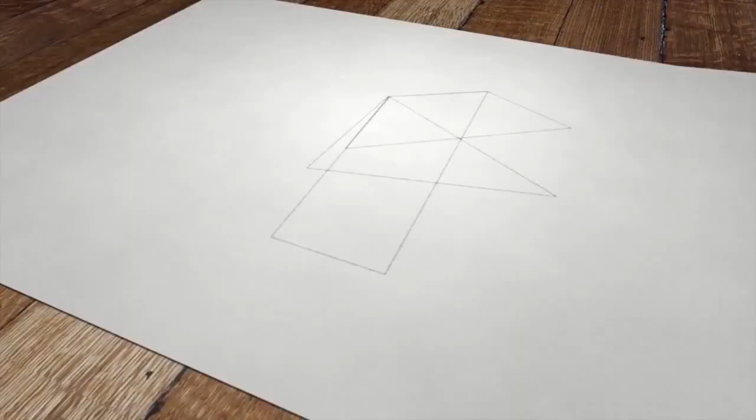I'm going to share with you how I made this guy over my Christmas break. We get to work with so many great companies over the course of the year, and over Christmas we just shut down, so I was able to log some good quality time with our CNC machine here in the office. I made this trophy to commemorate my favorite soccer team in the Pacific Northwest, the Portland Timbers, and they won the championship this year.

So what I got here is the Timbers axe and the star for the championship and the year. I was able to make this thing out of white maple and walnut, and I did it all in Fusion 360. This video is going to show you how I was able to do both the design and the manufacturing part all within the same file. Hopefully there'll be some best practices, or maybe some tips and tricks you didn't know, that you can use in your projects in the future.

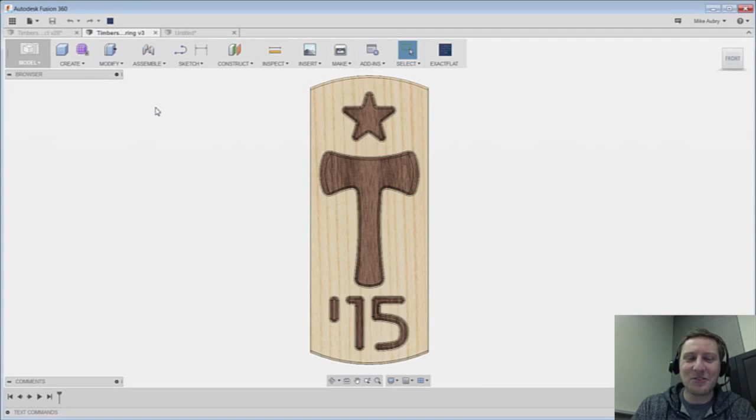So I'm going to start off by making a new part here, and we'll start on just the back side. The first thing I do when I make models like this is set up all the guiding parameters for what I want to create. I'm in creation mode right now, but I still know I'm going to be making changes later.

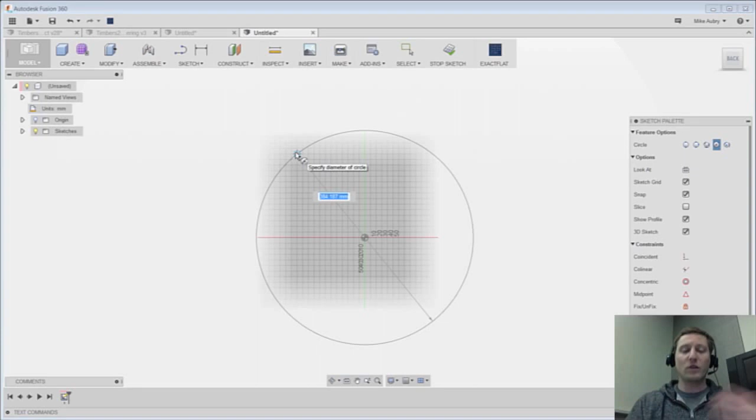So I start with what I know, and I know I wanted this stump. I wasn't sure if I was going to do it in one piece or multiple pieces, so I create it with these dimensions in the sketching environment. Basically it's going to be about a foot. Let's start with that. I could go back later and partition if I need to, but this is my first general size.

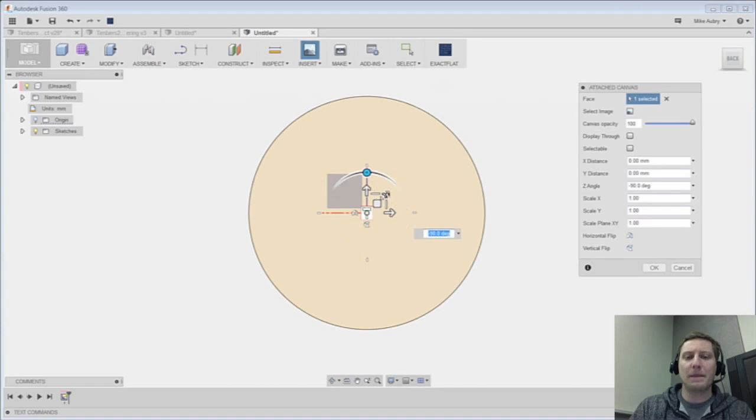The next thing I'm going to do is bring in my canvas of what the axe is going to be. That's the central piece I need to play around with. So I'm going to bring that in. I don't know how big I want it to be yet, so I'm just going to generally size it, then do a quick sanity check of how big or small it is. I'm going to turn things like display through on as I start to create things, so I can still see it.

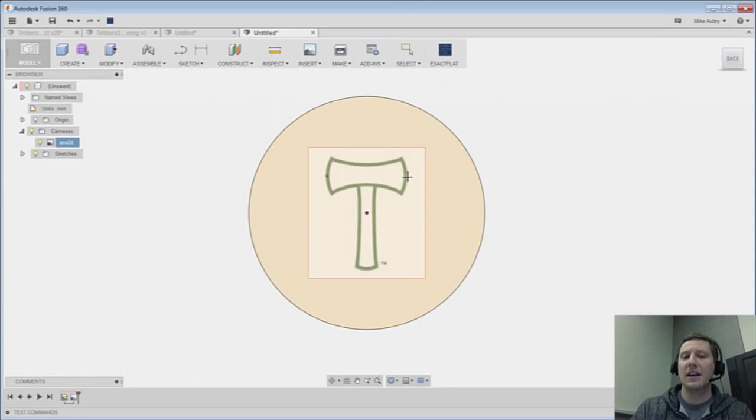Let's bump down the opacity so it's not in my face so much, and we'll create around this. The next thing I'm going to do is calibrate this. So I'll go into my canvas and calibrate it, just by clicking here and here, to get it roughly to about the size I think it's going to be.

So we'll say maybe 7 inches ish. I mean, that's really big, I'm going to have to size this down, but that's okay. So we'll just leave it at that size for now.

The next thing I'm going to do is start actually modeling it to get the proportions right. I know that's going to be a little big, but I'll go ahead and model to this, and I'll use the scale tool to make it smaller later.

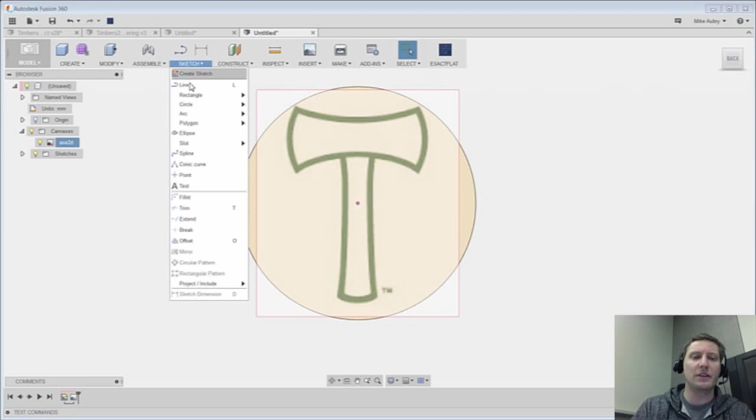My first thing is I'm going to register this guy as being the actual trophy profile. So that's one sketch I'll be maintaining. The next sketch I'll maintain is for my inserts, and I'm going to make their own sketch for that. I'll start by creating this axe, and then we'll make the star, and I'll put the numbers in as well.

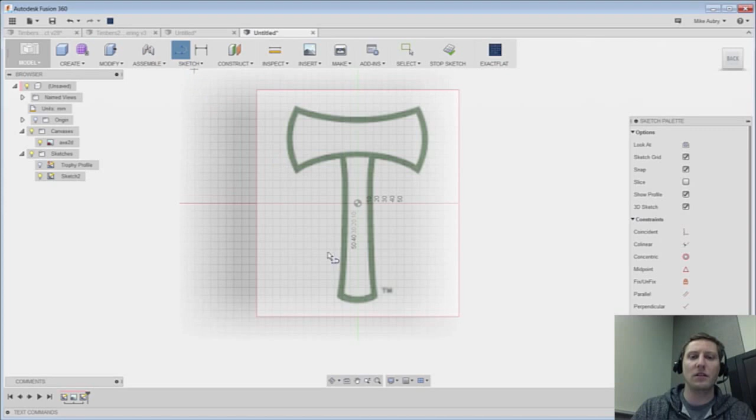One of the things I'll do is start by creating basically a central axis, and I'll mirror these guys on the other side so it's symmetric.

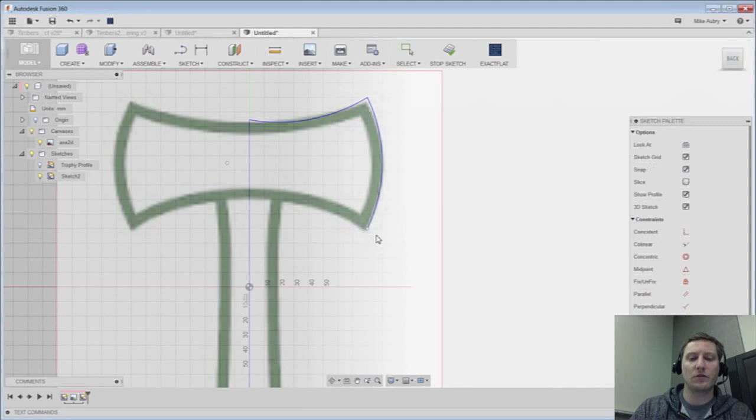With the arc here, I'll start making these arches, picking kind of there to there. It doesn't have to be exact here, I can go and change these things up in a bit. Go U to U. Actually, let's make sure that they connect though.

So make sure these guys are there, and we'll say go, and this guy actually kind of straightens out. So I'm going to take this guy, go there, and then this guy, go to there. I like that, and then we'll say here, and that looks pretty good.

Now to make sure that this guy actually lines up, I'm going to add these little lines to make some tangencies so everything nicely rounds off and I don't have these hard edges. I'll add these extra lines here, and make them all construction lines so they aren't actually part of a profile later.

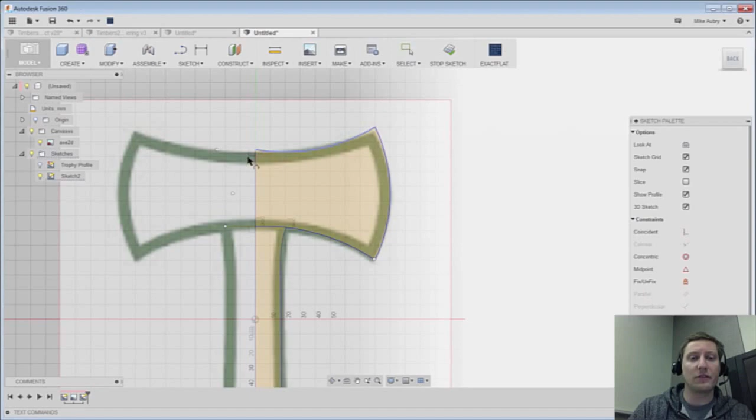Now I'm going to use my tangency constraint, so you'll see we'll make this guy tangent, so there'll be a nice continuous movement in this axe. That's looking good, pull this guy in, and we'll do the same thing now to this guy. Oh, there we go, take this guy and you...

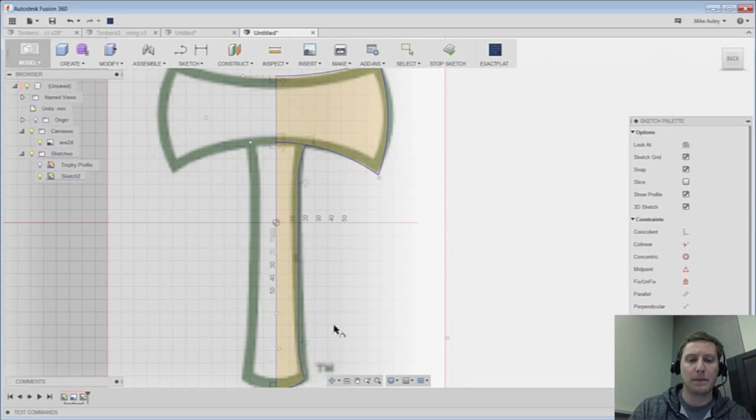Love that. This guy needs to be vertical, so I'll use this vertical constraint to make it so it's always up and down. Let's see if those constraints behave a little better. Yep. Love that, and then the final one. Okay, so that's looking really nice.

Actually, that guy models really fast, and that's looking pretty good. So now what we'll do is mirror it. We can do the mirror at the feature level, which is a best practice if you think you're going to be dealing with specific parameters and making a lot of edits and whatnot.

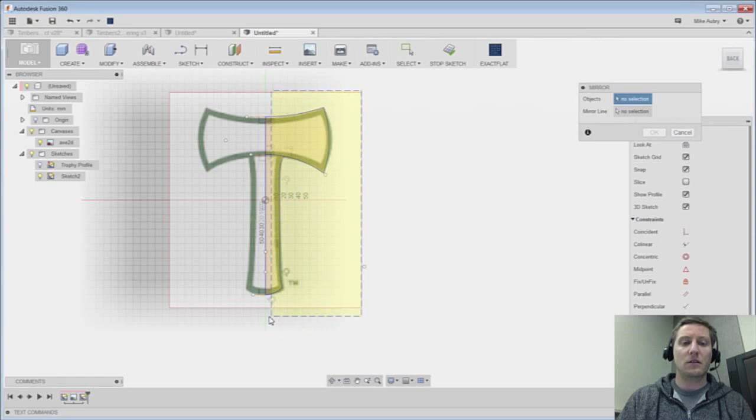My only edits I'm really going to be doing to this guy is actually the scale. So for me, it makes more sense to do the mirror at the sketch level. So I'm going to do this guy and then just mirror it about that center point there, so I have one profile to work with.

I'm actually going to turn around and make this guy a construction line, and you can see now how I can just choose these different profiles. I think I'm going to keep these guys as one big cutout block, but it's nice to have the flexibility—if I wanted to do two pieces, I could. I like that, and I'm going to go ahead and stop my sketch.

So for now, I'm going to keep them as one, and we're going to extrude them out. And for this, how high do we go? I can make a choice for this.

But it might change, and actually the height of that insert is going to be a function of the stock wood piece that I purchase. So I'm going to go ahead of time into my parameters and set one up so I can be more flexible later on. I'm going to call this insert height.

Actually, maybe we'll just call it insert H, depending if you can remember this stuff. So we'll call it insert H, and it's going to be, we're in America, right? So it'll be something like 3/4 of an inch, maybe a 1/2 inch. I'm not sure, I'll say 3/4 inch.

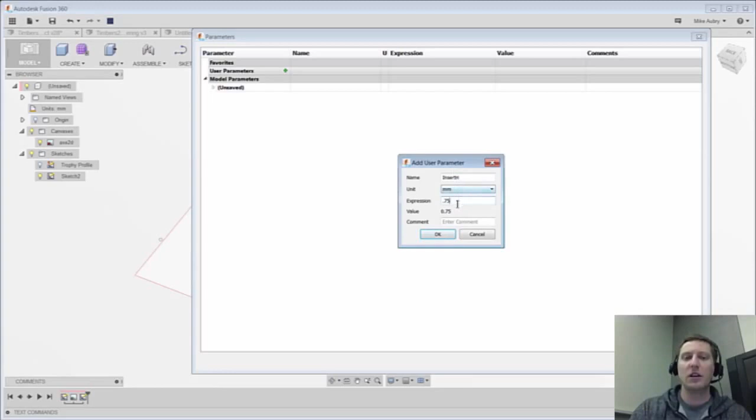And then that will be actually what I then go and extrude. So I'll just take this guy and extrude, pull it up, and then just type it in. We'll call this guy the insert H. And that height will be super handy because we can keep that now for all the other different pieces as well, and if we need to change it, it's going to be one place where we change it.

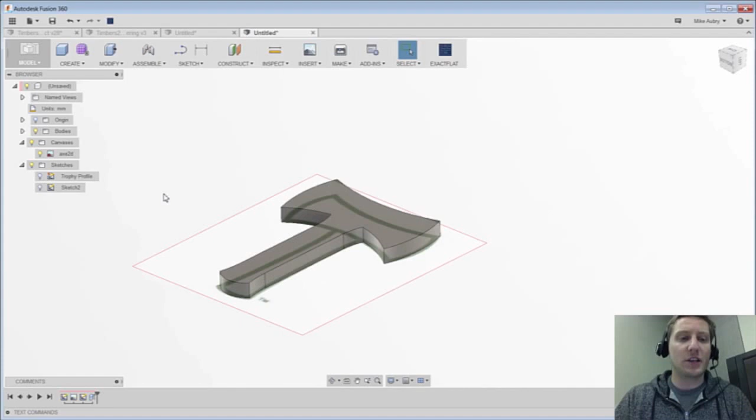So I got the trophy done. So now this is going to be my insert profiles. Good best practice to name these, because then you know what you're doing later. If someone else has to edit it too, they know what they're looking at.

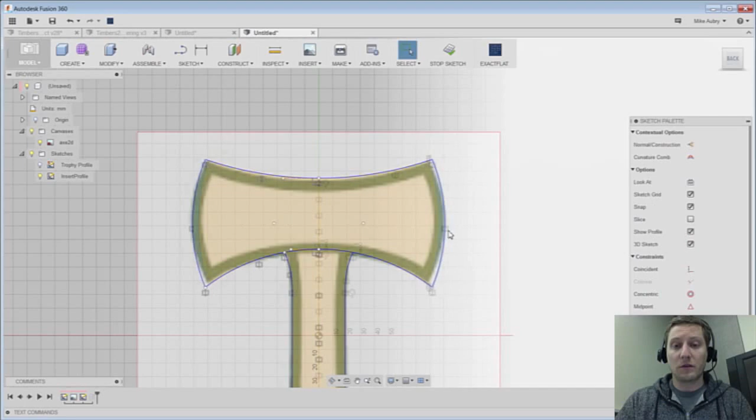So let's go and actually make this guy a little bit further out. I'm not sure I like that. Let's make it so these guys, actually the more I'm looking at this, I would like you and you to be aligned, and you to be a little bigger. Yeah, like that, that's better.

Okay, so now we need to make a star. So I'm going to draw this out the same way I drew it out when I was a kid, you just kind of go here, here. Well, what I didn't have when I was a kid was the ability to deal with proportions. And to do stuff with proportions is really awesome.

We can just quickly use this break tool to basically segment the lines, so now they're all their own discrete lines. And now check out what we're able to do here. I'm going to say I want these guys to always stay vertical. I'm going to use this collinear tool to make sure that these guys stay on the same line. So we'll repeat the collinear.

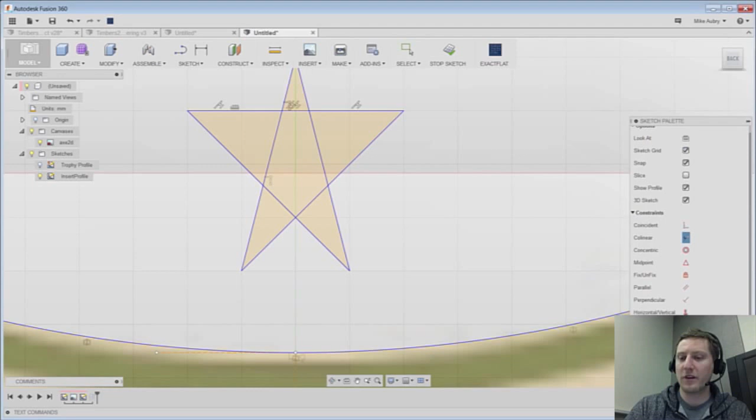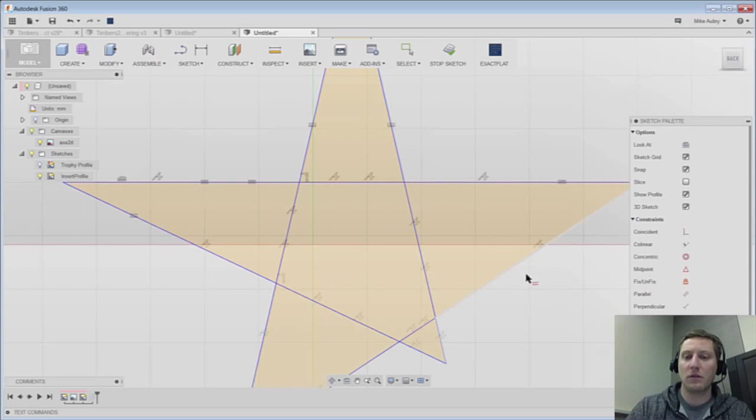You and you, okay, and now we're going to just have a great time making everything equal. You and you, and then you and you, and then you and you, and last but not least, I want you and you, then you. And then we'll do equals. You guys are equal, you guys are equal, then you guys are equal, and then you guys are equal. Oh man, this is crazy talk. Oh, look at all those happy equal stars, it just looks amazing.

Okay, again, I don't really know how big I want this star to be, but I know that's a start. So we just want it to be kind of symmetric about there, and that's looking pretty good. If I wanted to dimension it, I could, but the only real dimension I really care much about for this star is, you know what, one more thing to do here.

Let's best practice this. Let's make these guys in the middle here construction lines so we only have one profile to deal with.

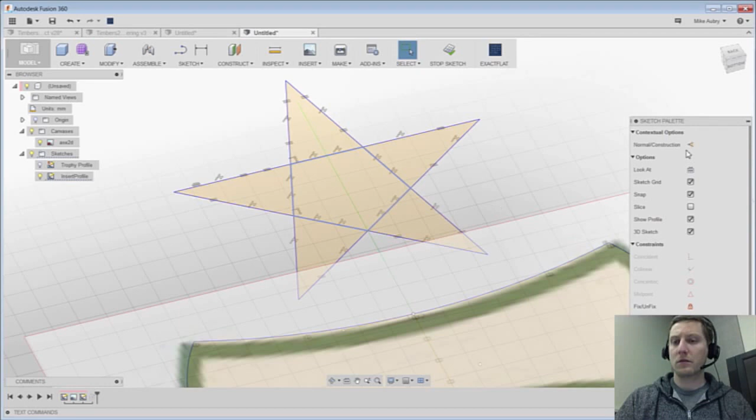All right, we'll take this guy, throw him up, and again we're going to use that insert H. We got one variable. Love it.

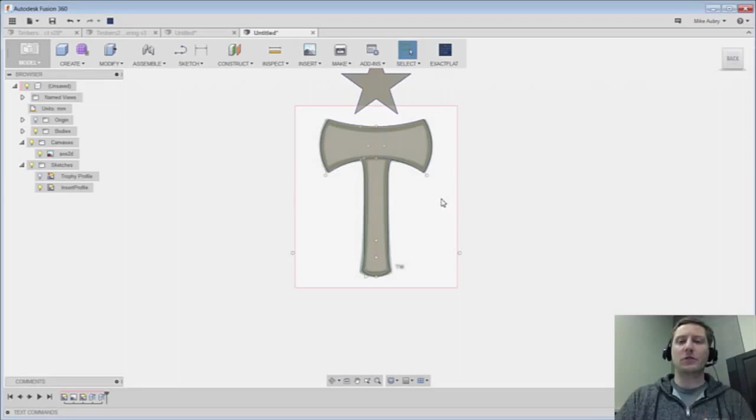Okay, the next thing we got to do is we need to choose our numbering. So one of the things I'm concerned about is that 2015 is just not going to be enough space, like that's too many characters. So I'm going to actually compromise and just go apostrophe 15.

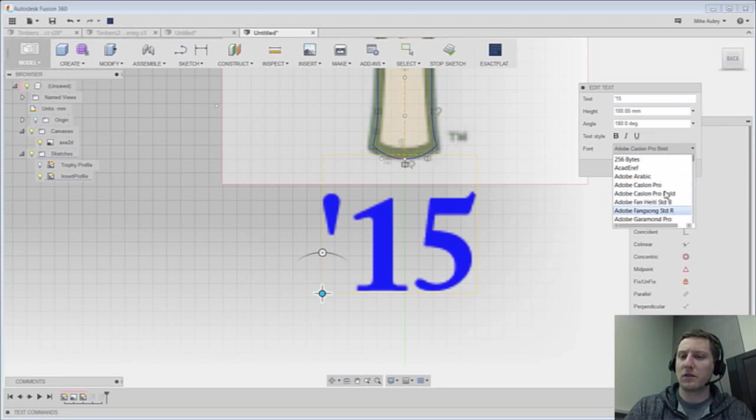So let's go back into this guy and we'll just type that out. We'll just go and take the text, kind of throw it down here. I'm not sure how large or small it has to be yet, but so there's 15. Throw this guy around, and I'll just kind of pick a generic font. Adobe Agency. Oh, Agency looks pretty reasonable. Okay, all right.

All right, we like that value, so we'll go in there and we're gonna need to center that up. There we go, and that looks about right.

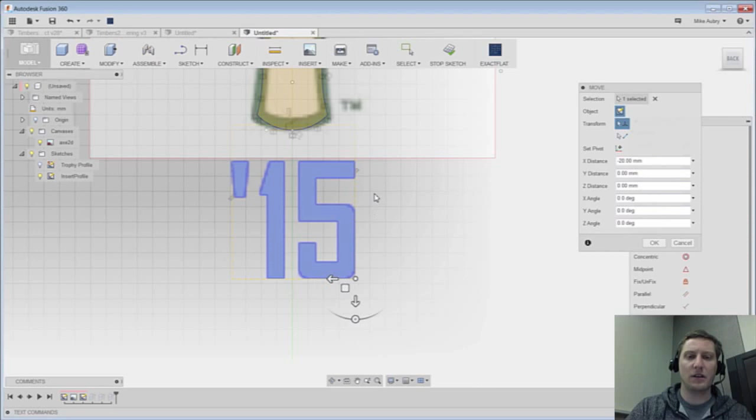And now we've got to make this thing so it'll fit in that trophy stump. So I guess the next thing we need to do is we actually need to make the stump that it's going to fit in. So this is going to be actually a different stock. So I'm going to go in, and again, we're going to want to change this stuff later, so I'll actually call this thing the trophy height.

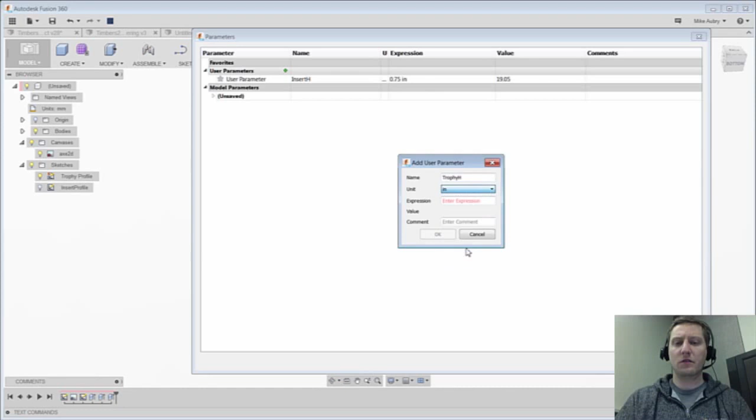Inches, we'll just call it the same with .75 for now. I don't know, half inch, something like that. So we'll take this guy, we'll extrude him. Say we'll just push this down because we're not sure quite yet what it's going to be. We're going to say this is going to be negative trophy height.

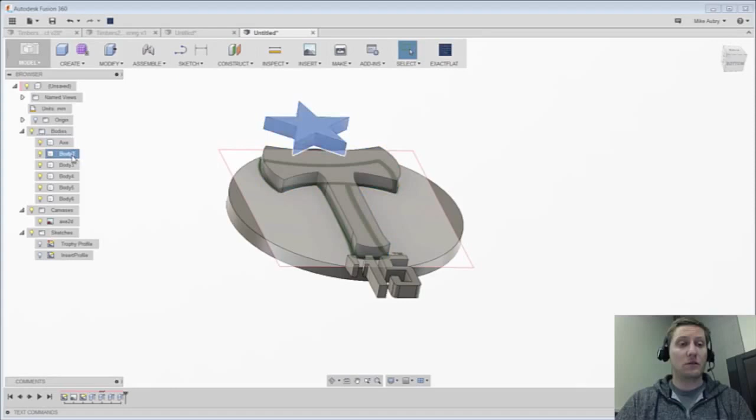New body, so it doesn't join up with the other ones. Let's make sure we're labeling these things along the way so we know what we're working with. So this is the axe, star, 1 the loneliest number, 5, apostrophe, and we'll call this the trophy, or the stump or something like that.

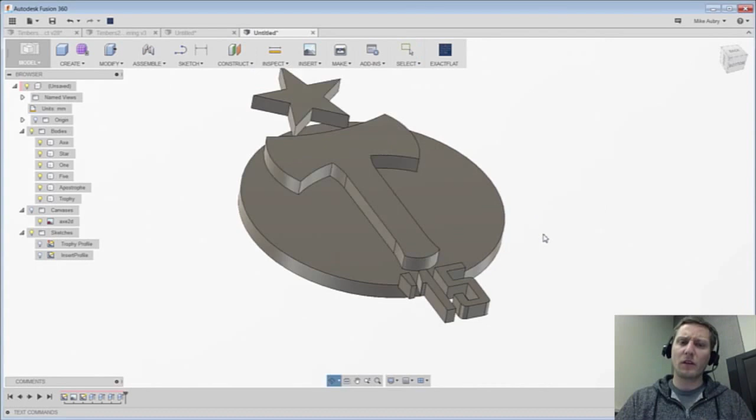Okay, and we'll go and turn off this canvas for now, we're not going to need that. And then we need to get these guys to the right kind of general size to fit.

One of the things before that is we've got to make sure this thing is going to be manufacturable. I know my CNC only has 6 millimeter diameter tools, and I have 3 millimeter diameter tools. I want to make sure the ones I can actually use make everything as flexible as possible, since I can only go so deep with the 3 millimeter.

So actually, let's make it so everything is only doing a radius of maybe 3 millimeters, to work with the 6 millimeter diameter tool.

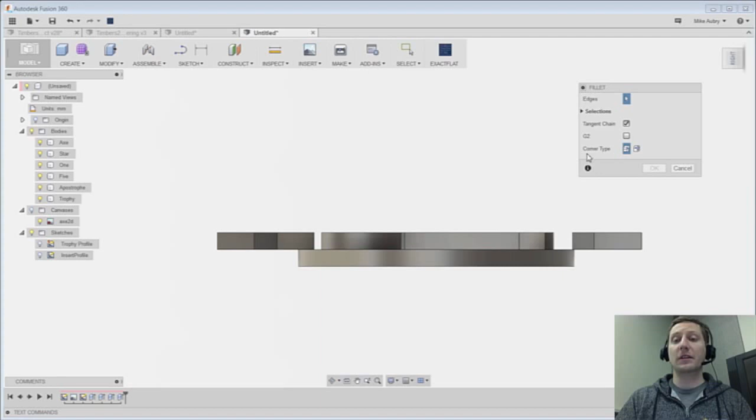One of the ways we can do this is we hit the F key to start the fillet, and this is kind of a slick trick. If you just go across and choose all of the edges on these inside edges here that it's going to have to maintain, these sharp edges on the outer, go around these. It's these inner ones you need to worry about the radius for.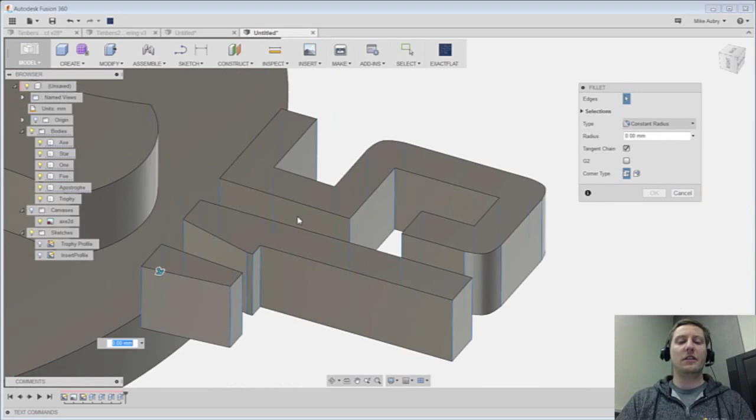Depending on the type of font you chose, you might have a bunch of extra crappy edges on your SVG. So this fillet can help you heal some of those edges and really maintain radiuses that are actually machinable. So this guy will just call us out and see, can it hold a 3? And they can, so we've got 3 on all these guys, which is super handy.

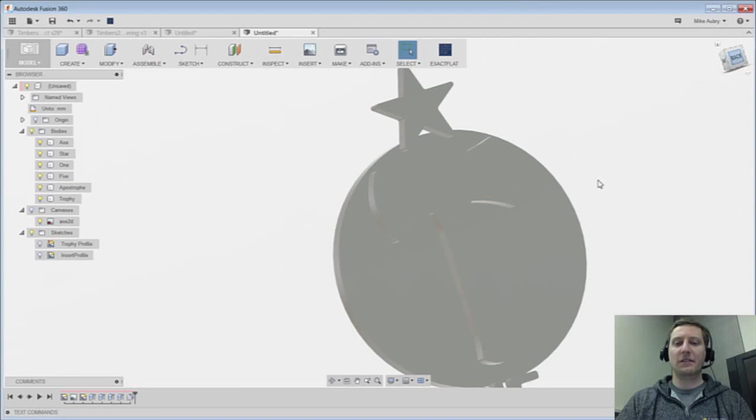But where it gets kind of fussy is that this is going to be too big for the footprint I want to deal with anyway. So I'm going to have to scale all these guys, and probably scale them individually. One thing I'm going to do is scale before I do my radius, because that radius is going to remain absolute. But let's start scaling these things down and see if they can maintain it.

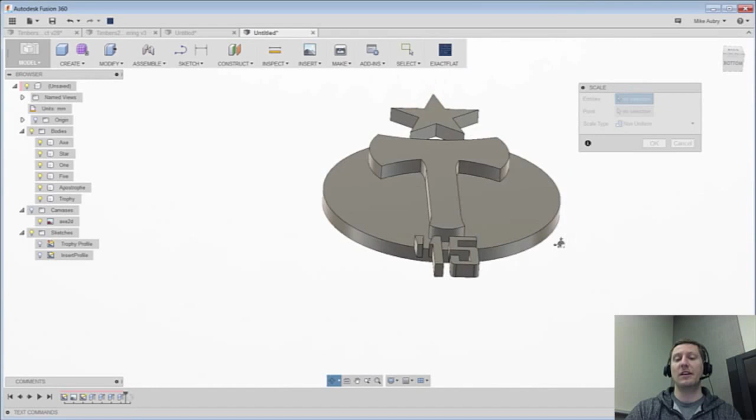So the scale tool is amazing. This is where I know I have a specific height I want to maintain, but I need to actually size down the other proportions. So I can just start choosing these entities, and we'll kind of scale this guy. The point will actually be, in this case, the origin that I'm scaling about.

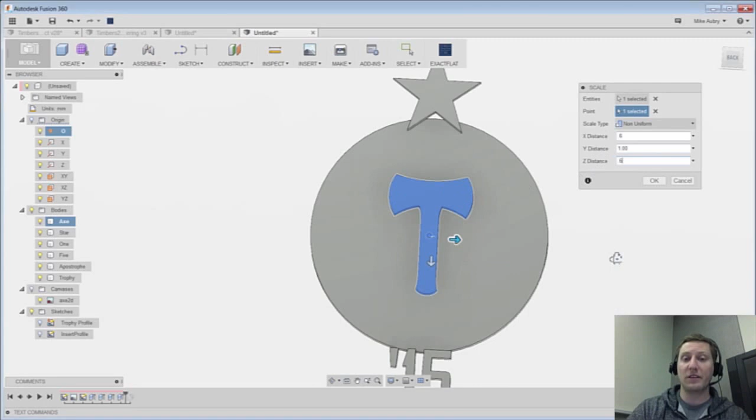Check this out, I can do a non-uniform scale, and we'll size this thing down to maybe 0.6 of what it was on the X and the Y, but we'll keep that Z the same so the height stays the same, and we'll give a little bit of room for the stars to come in. So we'll say maybe this will be 0.6.

I think these guys need to be their own, I'm actually going to give them their own center point to scale around too. So let's give these guys like maybe something like, yeah, that looks like a good spot. Kind of just make a little line for a little point for these guys to scale from.

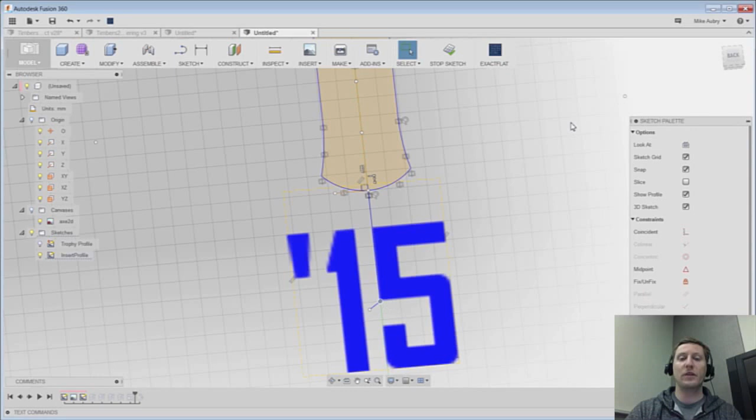So I'm going to go to modify, scale. I'll choose you, you, and you, and then we'll scale about this point right there, and again non-uniform, so we'll bump this thing down to 0.6 again. You get something roughly, yeah, I'm not sure, something like that.

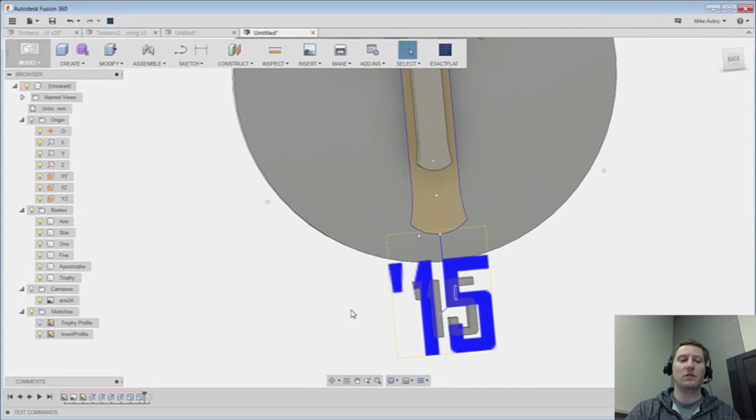Where it gets fun is after we go and take these guys and move them into place. Say it's going to be roughly about there. Um, have we gone too small?

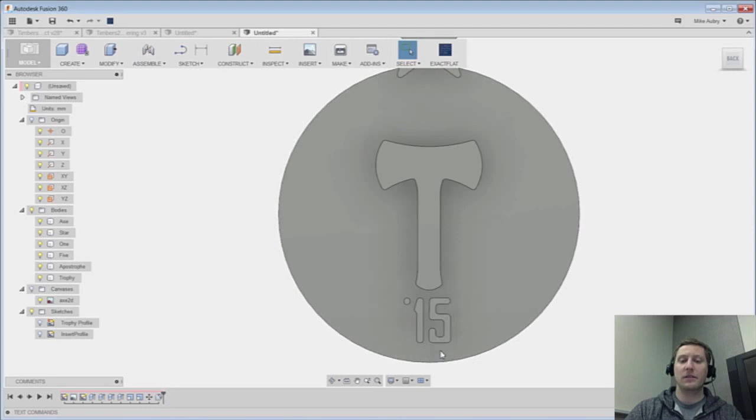Let's go back in our timeline here and turn back on that fillet and see if it maintains, and say, yeah, it does, so they didn't fail. It's looking like it's cutting off some of that one a little bit, so maybe we went a little small on it. But this, I picked a good font, a pretty flexible font.

That apostrophe is looking more like a dot, so maybe we go back and actually change this. Let's bump this up a little bit.

So yeah, that's looking a little better. We can probably even go a little bigger. Go big or go home, huh? Let's go 0.9, see how this thing is.

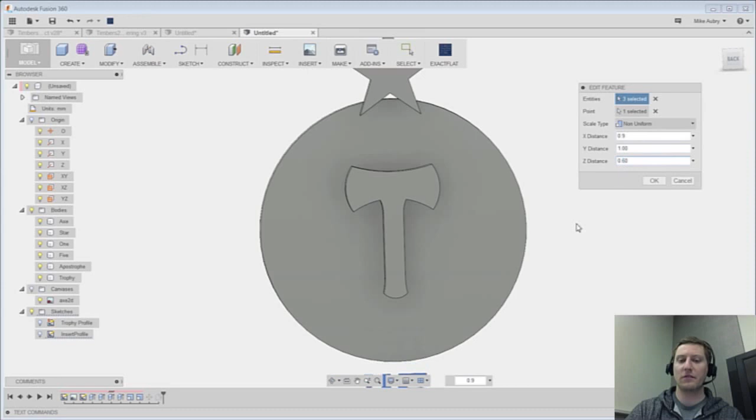Okay, but still, maybe we want to make this thing, that's looking a little fat. So let's size this thing down a little bit. Maybe the X will be 8. Actually, no, it's the other way. It's the Z, actually. Let's make this thing like 6. Yeah, there we go. Okay.

So that's looking good. Now let's size down that star a little bit. That star is looking a little big, and we can move things around too here. So we'll do a little scaling operation here for this guy.

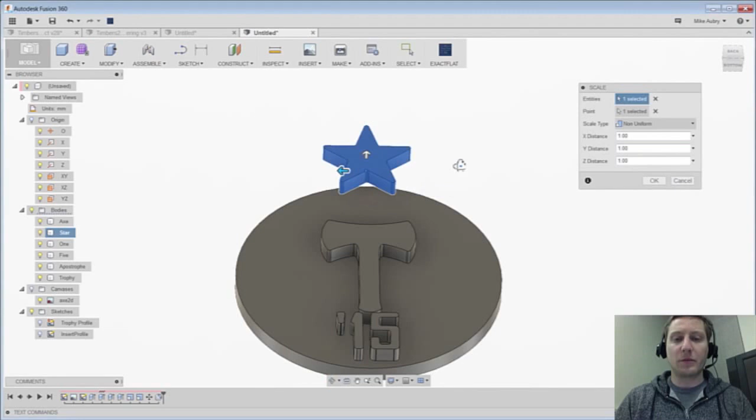That's probably a good enough spot to scale it from. Although ideally you want it to be scaled from the bottom point. So let's give a point, let's get something in the center here. Actually, the more I think about it, let's give you your own scale point too.

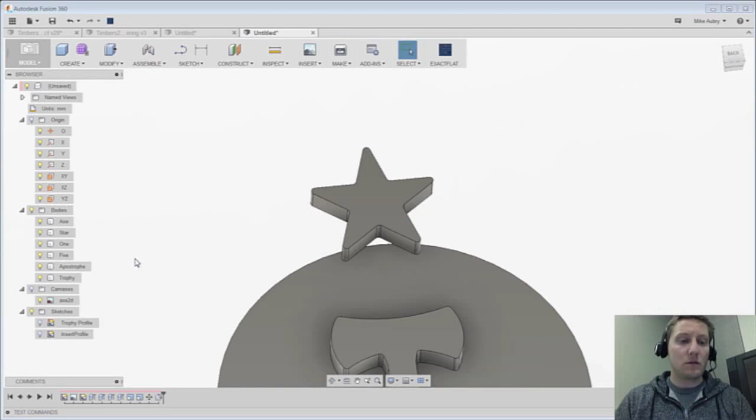There we go, something like that. Scale it from here. Non-uniform, 0.6, 0.6. It looks about right.

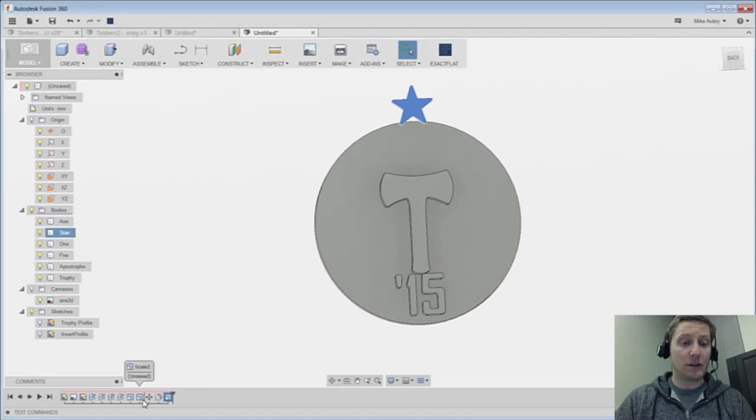And let's see, let's do that before the fillet and even before the move. And that guy is able to hold the fillet as well.

Loving it. Okay, let's just start moving some of these guys. So the axe needs to come up a little bit. The star needs to come down a little bit.

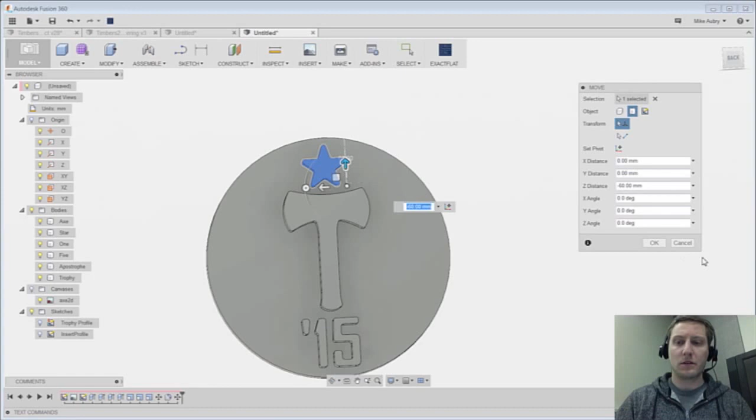So that's just kind of a proportions game. We can go and play around with these different sizes and stuff, but I guess for just demonstration purposes, this is looking pretty good.

Now at this point, as I was playing around with stuff and looking back at my CNC, I noticed that I could fit things. I could go long on this and fit in there, but actually I was limited. I really can't go wide. As the table moves back and forth, it doesn't work, so I can't actually maintain this circle unless I want to do different inserts.

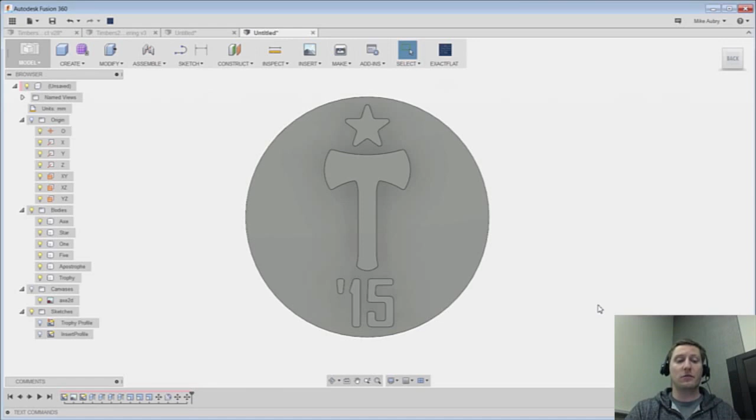So due to time constraints, this is the point when I reached that I wanted to go more of a surfboard shape. The way you adapt around these things, if I ever wanted to go back or make slots or do other things, it's no big deal — just go back and change the profile.

So here we'll just go back and change this guy so that I have a really clear idea of what the profile is that I have to maintain, I guess. So I can go in and actually make this something that's in line with what I want to machine.

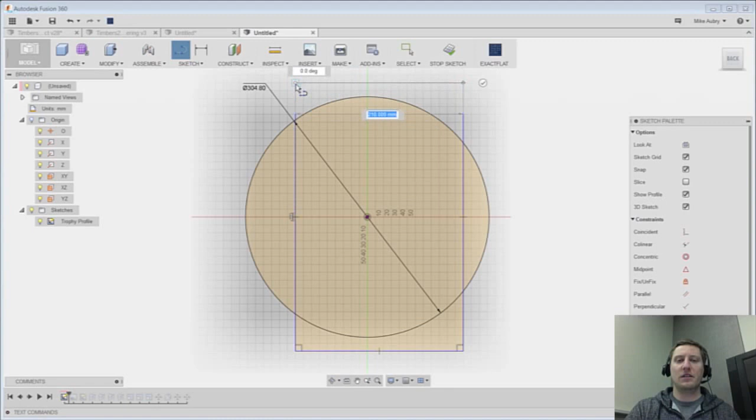Now, how thin do I have to go here? So I can go and set this guy up for the minimum thicknesses for my actual machine bed. One of the things I'll set it to is — it's all in millimeters because it's German, God bless it — this guy, the width actually is only 210 millimeters.

So we got to do that, and then we got to center it, right? So it's centered about this guy. So we'll create this guy — it'll be this guy divided by 2.

Let's go back to our extrusion. This guy, so it doesn't include these guys anymore — no big deal, I'm just hitting the control key and unselecting them. And then we're sizing these guys all back down.

So that's looking pretty good, like it fits. Okay.

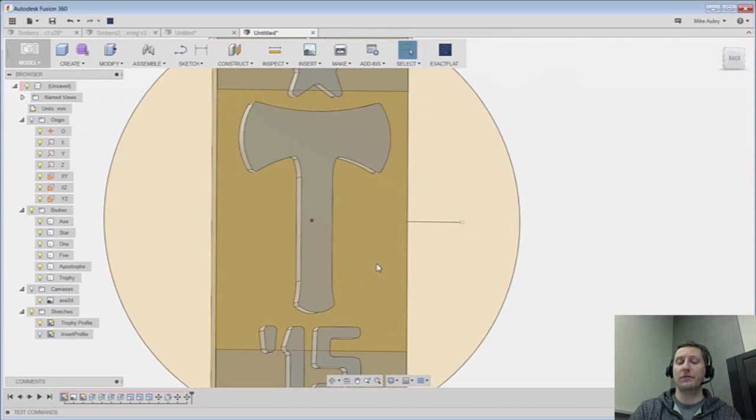Gonna add just a little chamfer. Actually, no, just to you — no tangent chain, just you and you. Let's cut this axe, something like that.

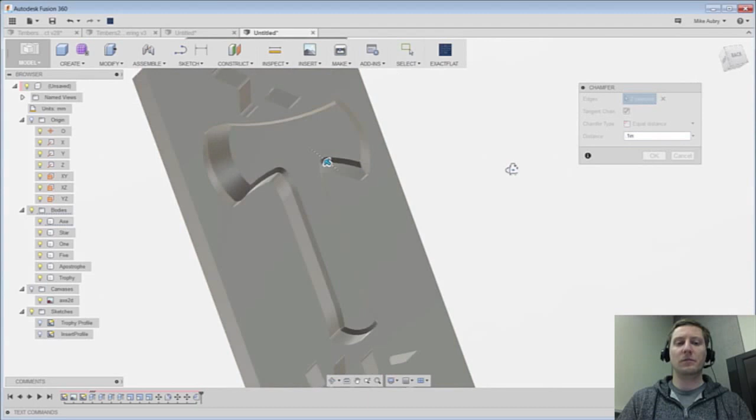So actually, let's do like 0.1 inches, because it's actually a 1/4 inch chamfer I have. So we'll take you, and let's do them all as one, because this will come in handy when we're going to actually machine these guys.

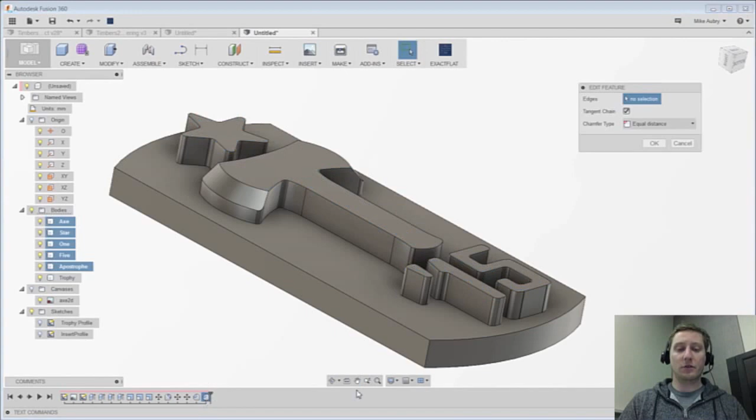There we go, okay, that's looking good. Okay, I like that. And then we'll do the same thing — let's add these guys too.

So I think that'll just look nice. Yeah, so you add your chamfers at the end, right? Because it produces a more flexible model.

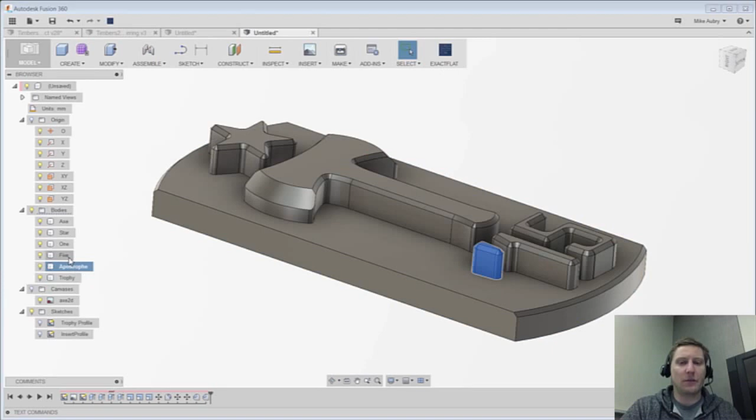So let's start creating the actual inserts here and deciding how far down we want these inserts to go. What I'll do is just a separate move operation for them. We'll do them all at once, and we want them to keep a unified level. I don't think I want anything to be more raised than the other, so I think we'll go down 10 millimeters, halfway down.

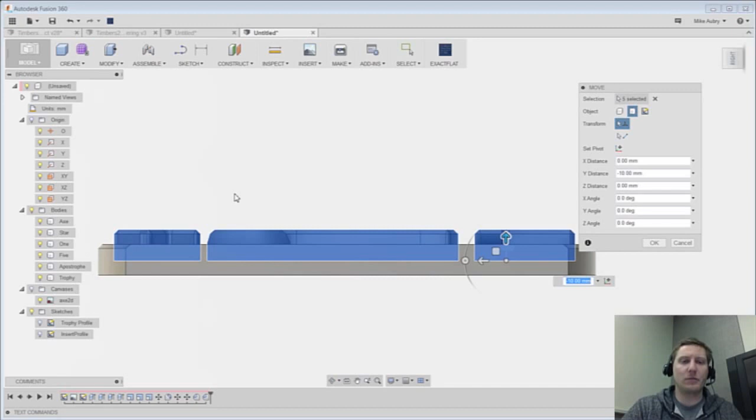That sounds doable, something like that. If I'm using the 6 millimeter tool, I think I can make that happen. So I'm going to pick that for now and say yes.

Now I've got this overlap between the different bodies, and this is where we can use an amazing tool called Combine, to make space for where the inserts go without having to remodel anything. It's incredible. So look at how it works.

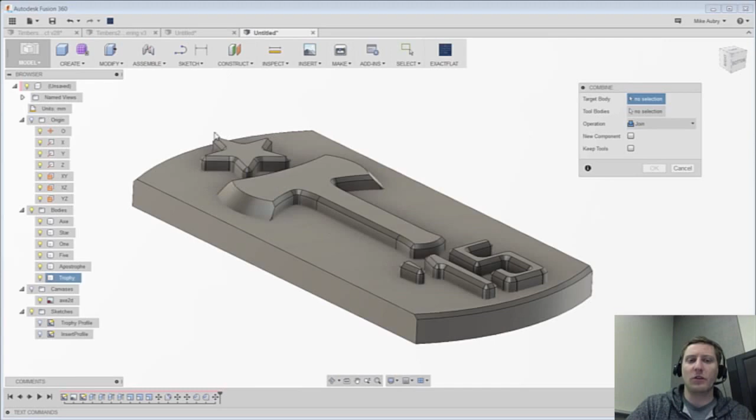I just give it a target body, and then I give it my tool bodies. So I say you, and you, and then I say cut, and keep the tools because I don't want to delete these things when I'm done. And look at what it does.

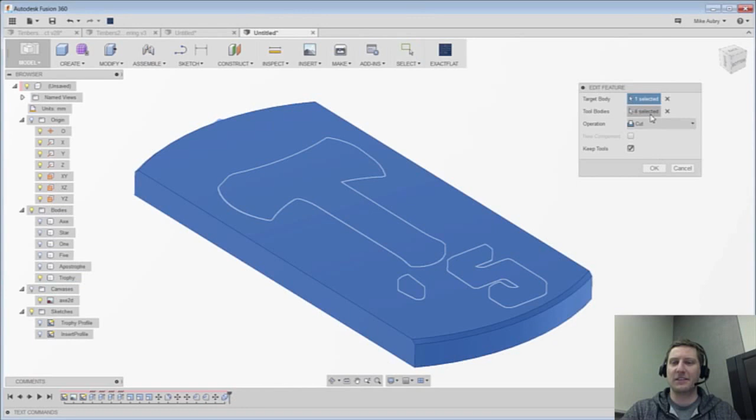I just go and turn off all these parts, and now I've got these insert spaces. Actually, as I'm looking, I think I forgot to select one. Where's my one? Sorry, he is lonely. Well, there we go.

So the next thing we need to do is make it so the insert fits well. I want it to be a press fit, but I've found in my last project that with these tiny things, as I'm trying to pound them in, I break them if there's not enough clearance. It needs to be like a slip fit, not a force fit. So I need a little bit of an offset, and there's a great way to do that with press pull.

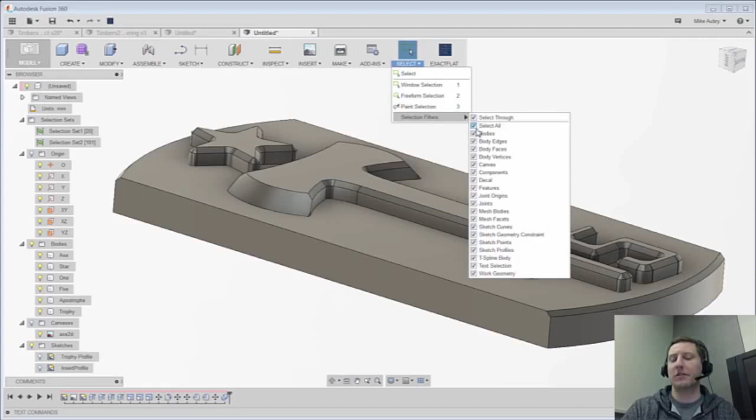Let me show you the click order to make that happen. If you go into your selection options, and everything's turned on, just turn it off and go by body faces. Check this out. If I go and turn off the visibility...

I'm going to add a tolerance to all of these inner faces. I'll say, let's go out a millimeter just to show it, and then we'll change it to a half millimeter because that's actually what I want.

What we can do is go to the side and make sure you've got select-through turned on. Window-select all of them, then use control command to unselect the fillet face and the bottom faces you'd choose. We can create what's called a selection set, so we'll go and say create a selection set, and call those our offset faces.

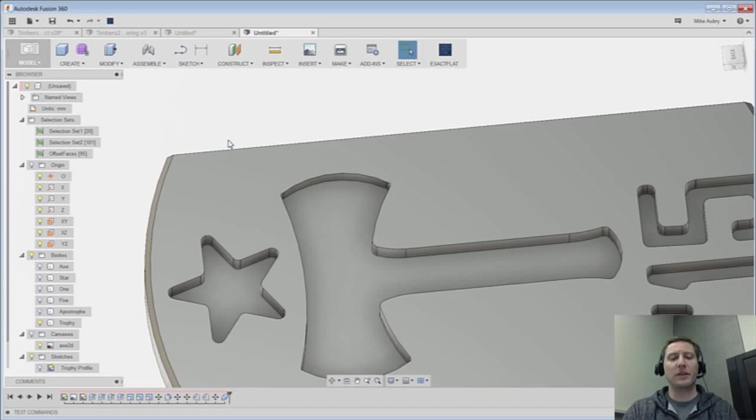Or actually, we'll call it tolerance if we really want to. But anyway, you get the point - it's a tolerance. And now I can go and actually use press pull.

If you choose an individual face, press pull is really handy because you can push things in or out a little bit. But what we want is that press pull will either modify an existing feature if it was based off an extrusion, or create its own new offset. And that's what we actually want here - I want to make a new offset.

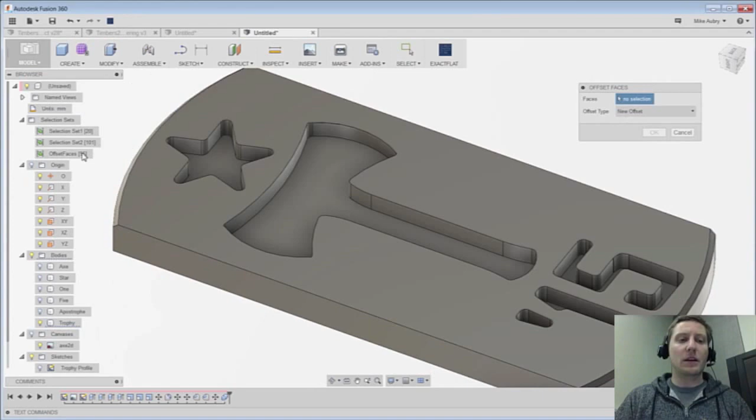I'm going to do it by going over to my selection sets and selecting that saved set of faces. This is awesome because then I can just say I'd like you to go out an extra millimeter. So it'll adjust some things - it's going to tell us that. And now this thing is offset an extra millimeter.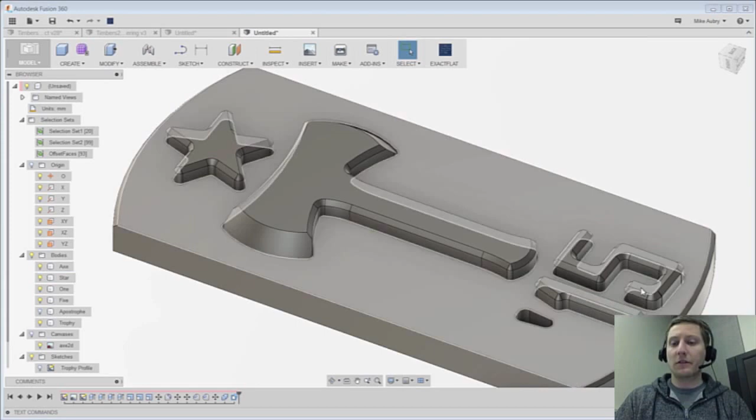Take a look at what it does. If I go and turn these things back on, we'll go to a view so we can see it. You can see now there's that extra tolerance we have.

Let's go and change it here at the parameters level. If I change this guy out - actually, let me deselect this thing so it's not in our face - we'll go and change that parameter. Just go and find it under our saved sets here.

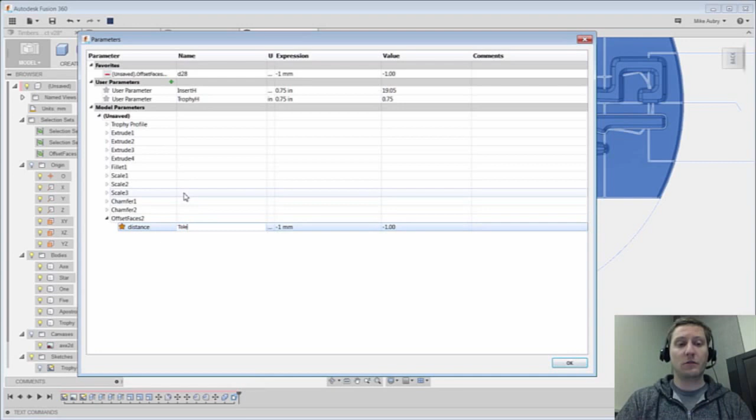Go down to our offset faces, turn this guy on. We'll actually call this our tolerance - I can rename this to tolerance. Let's change this thing back down to maybe, so we can see it. We'll zoom in and bump this back down to maybe half a millimeter.

And you can see that guy, that'll get smaller.

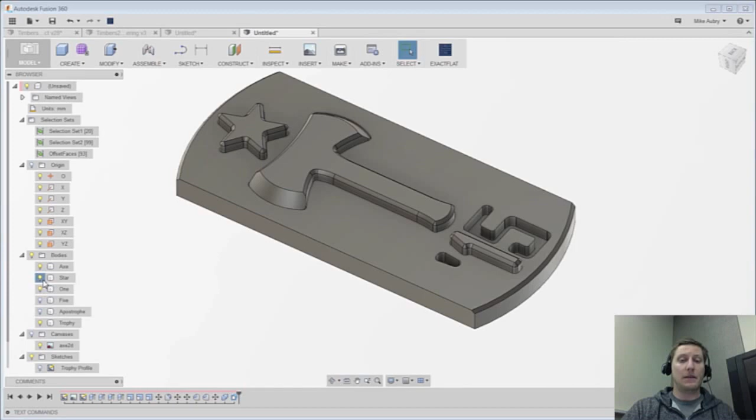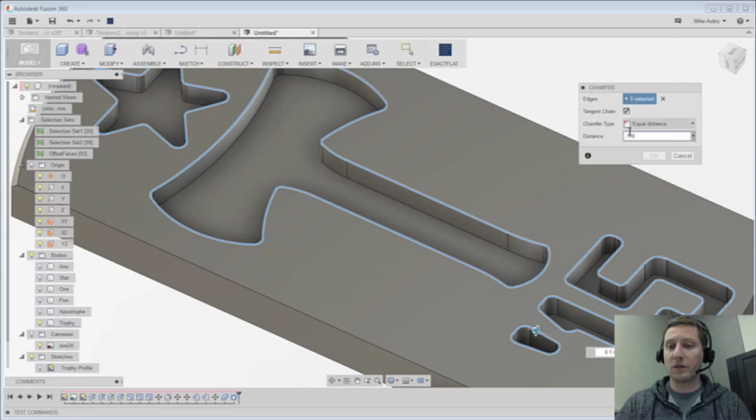So now this edge will be smooth, it'll fit right in. And then also, to make it look sharp, I'm going to add a chamfer to these edges as well, just to make it look nicer when we machine it, and also easier to insert. Maybe we'll call this 0.1 inch. Can we go 0.1? Yeah, there we go.

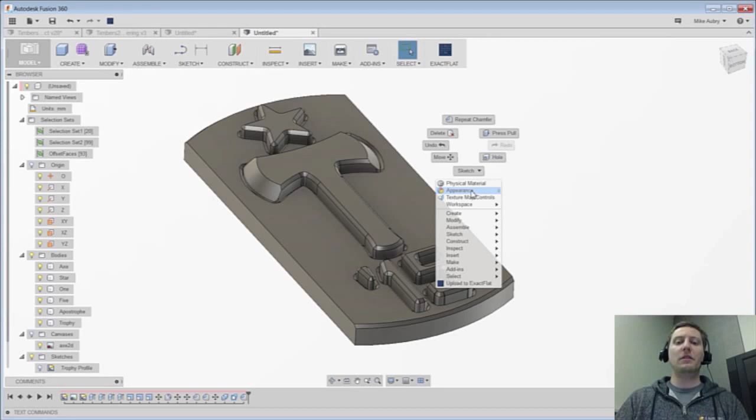Okay, so we've got this. Let's make it look pretty. Before we commit to making it, I've already done some renderings along the way with my last model, but this would be about the time I'd say let's see what this thing looks like. Go to your appearances, and we have a lot of great ways to do this.

In this case, because I'm doing wood, this solid wood feature was added a couple months ago before Christmas. If you haven't tried this stuff yet, it's exceptional. In my case, I was dealing with some unfinished stuff, so I really like this - the 3D maple, which is actually a white maple on here.

So I'll go and apply this, push it up, and also what I bought at the store was some stuff in walnut. So I have walnut, this stained dark semigloss. Let's go - I can do them one at a time. Actually, it's handy to just click and drag this over top, you can just reapply them.

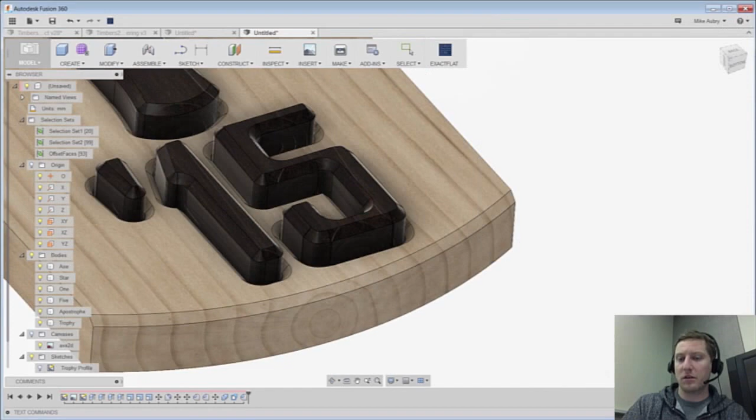What makes this so incredible is that this solid wood feature pays attention to where the grain boundaries of these things are. If we look at where this is based, you can actually see it when the chamfer is gone - it continues through. So we can make choices about where we want the wood to be, how we want it to look. If we're articulating to somebody else doing the work, saying I want it to look like this, the guy at the wood shop would probably have some words with me.

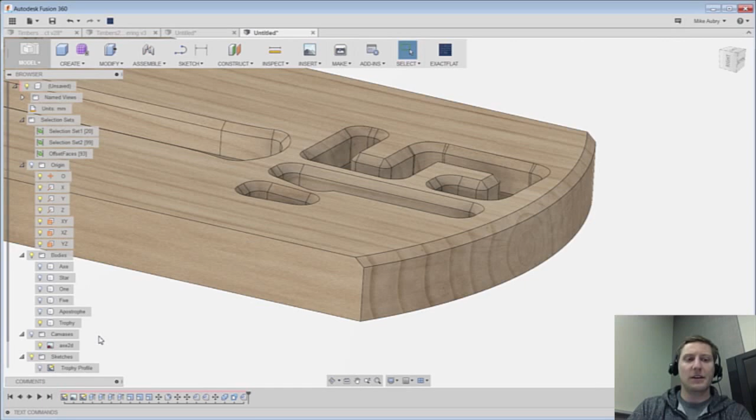This is really easy to change. I can go in for this case right here - if I right click and use texture map controls, it's really easy to go and just change where I want that wood to originate from.

If you need to make other changes to the shape or the appearance of the wood, under your appearance settings, if you double click on that, you get all sorts of different choices, like the thickness. So if we want to make the ring thickness bigger or smaller, that's where you'd go to change that. Mine looks about right. You can do things with bumpiness, even crazy things like changing the staining or wood appearance.

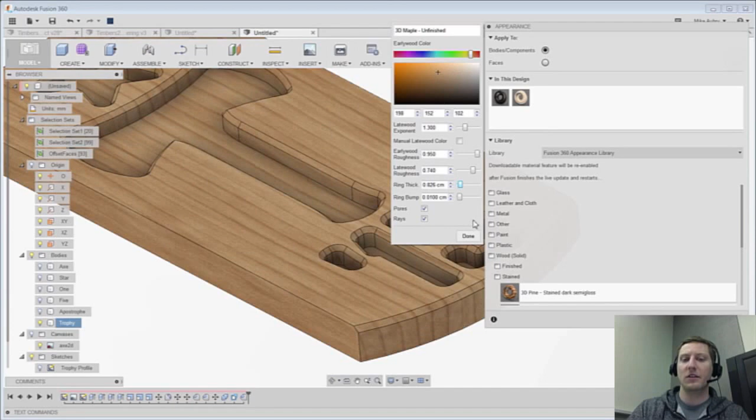Mine's actually a little - actually I don't like that, I'm going to go back and undo. Yeah, so we'll just leave it the way it is, and that looks pretty good. So play around with that stuff, it's so cool.

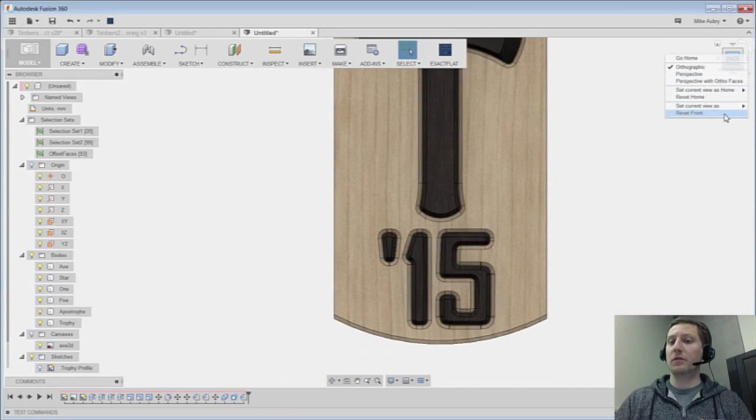And then we'll take this, and the other thing I'm going to do is change my view to the front so the lighting is correct. We'll bump this thing up, take the position, rotate it so the lights go in the right direction, and maybe bump up the light a little bit.

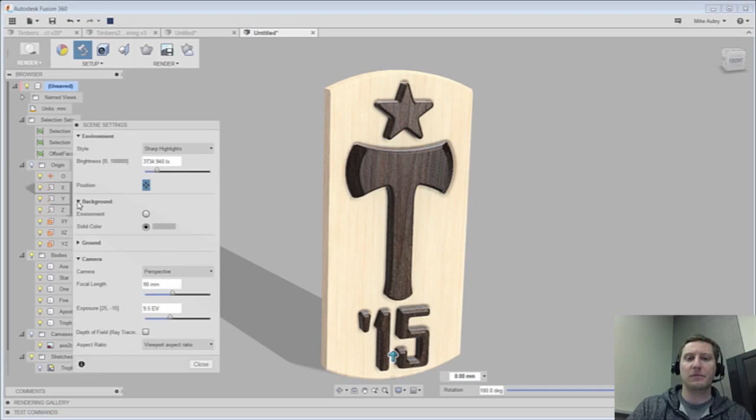Make it so there's a background maybe like Go Timbers, something like a green - yeah, I think actually a little more forest green. There we go. Bump up the perspective. Let's do the focal length, maybe make this a little more dramatic. There we go.

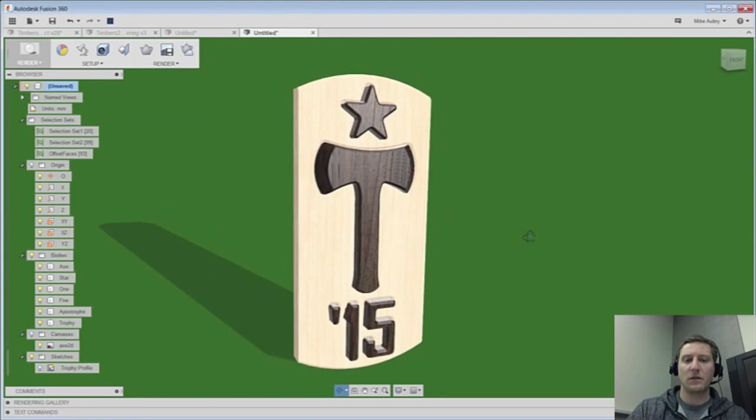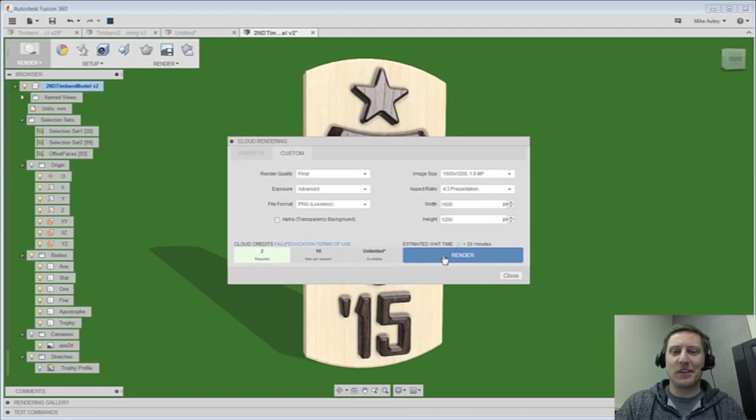So let's make this. Rather than having my own machine do the render, I can take advantage of cloud rendering. This is nice because I can have a different server do all the heavy lifting, and then I'm free to do my own work on my own machine. If you haven't tried the cloud rendering stuff yet, give it a try, it's pretty awesome. We're just going to go ahead and set this up, get it started, and go back to our work. We'll come back to that.

One of the most exciting things for me in this project was being able to create an awesome rendering even before I bought the wood. Take a look at what I made and then compare it to the rendering - they're pretty close.